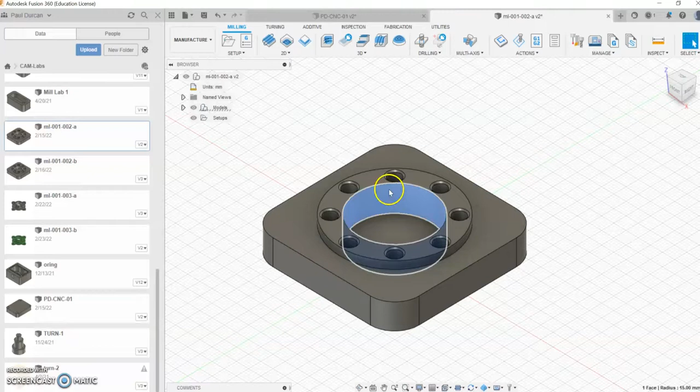Okay, we're looking at lab number 2 now. Similar to the first lab with just a few new commands. New commands being the pocket in the inside here and the tapped holes. But we'll quickly look at that and see how we go.

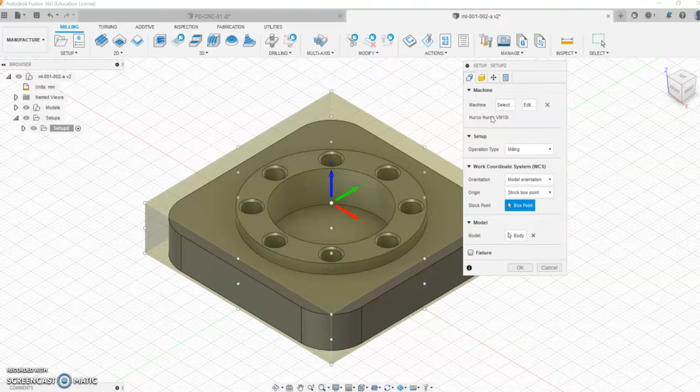So again, we upload our model onto our part using the modeling from SolidWorks. We go into our manufacturing tab from our design tab down to manufacture for our CNC. We're milling. We do setup. We select the same machine again. It should be in your library. The Autodesk 3-axis generic is fine, or the Hurco VM10i is better. Milling operation, and again our Z-axis must be the whole way up.

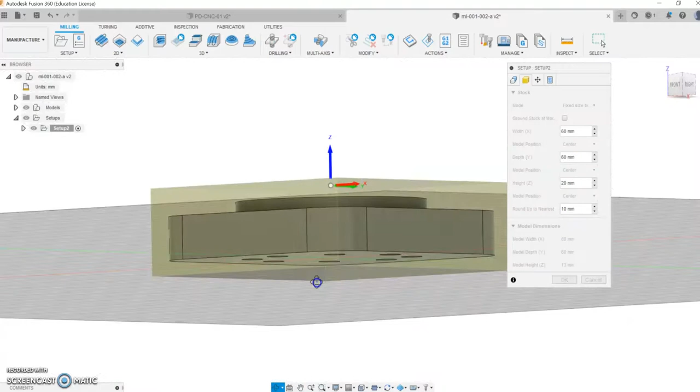Our stock setup is the same again. Rather than relative size, we can do a fixed box size. Okay, so we're looking at 60 by 60, and we're looking at a depth there of, maybe just rotate this around, have a quick look at it. Okay, so we want to correct the depth, and the 60 by 60, the part's actually 60 by 60. So in reality, we might have a block that's 70 by 70. So we'll take some material off. Okay, so it's centered there, which is fine.

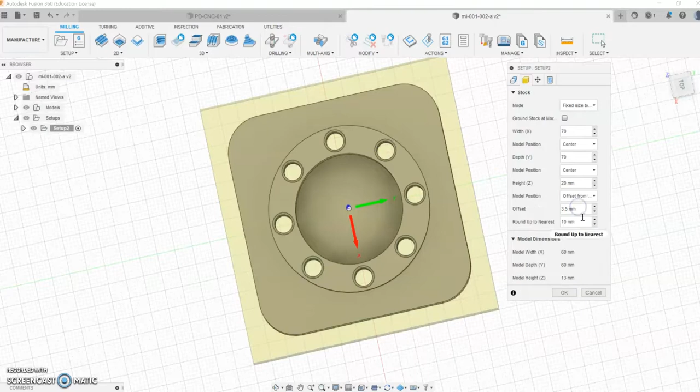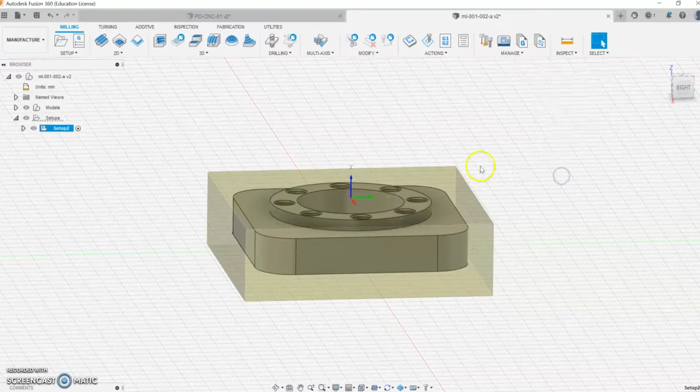And then our height's 20, but what we're going to do is offset from the top, and we normally offset it a millimeter from the top. So again, if we rotate that, we'll have a quick look there, and we're just going to skim a millimeter off the top, plenty to hold underneath. Power position, we don't need to do that. Good to go, and post-processing, we don't need to touch that. Okay, so that's our part ready to go. We have our stock set up and our machine picked.

So we're going to start off, like we did in the last one, with a face milling operation. So again, we'll just do our face milling operation. We're just going to select our tool. We're going to use a face mill. I used it previously here, so it comes up diameter 50 on the face milling operation. Our feeds and speeds are fine, we'll cover them again. Our geometry is stock geometry here, the yellow picks, we're good with that.

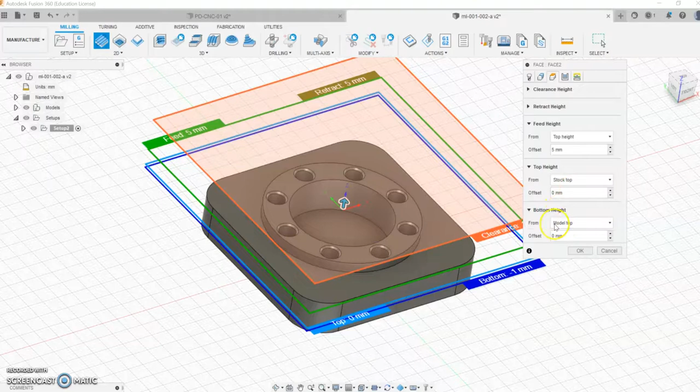Our heights then are our key again, okay? So our clearance height and retract height are usually okay. Our feed height, we're going to go from 5 millimeters from the top. Our top height is the top of the stock. And our bottom height is the CAD model, which is a millimeter again below that we set. So we're good to go with that.

The passes, we might go multiple depths in this part. And what we'll do is we want it to go over twice. And we'll say 0.8 is basically the maximum step down, and that should leave 0.2 then for the final step down. Pass extension, we can increase that if we like. So if you hover there on any of these commands, you'll see what it means. So it is the pass extension. Alright, so we could add maybe 10 millimeters to that to go on past the component. Stock offset, if you hover over it, it'll show you the distance extra it goes past the stock.

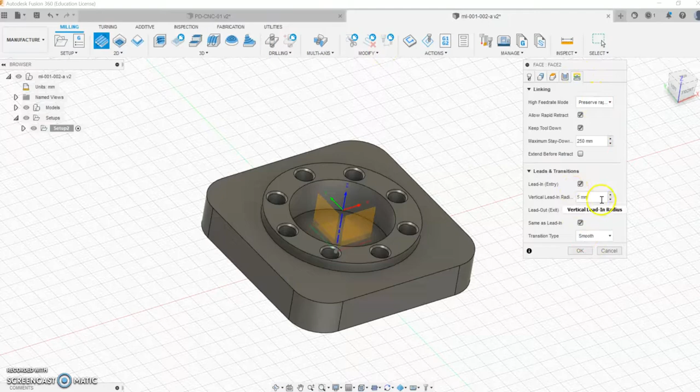Alright, and then linking, we'll leave that there for a minute. It's pretty good. Lead-in radius is fine. Yeah, and hit OK. So with every one you do, you should always check and see what's happening. So right click, simulate, and hit play, and make sure it's machining the way you want it. Now we want overlap in here on the stock. You can see on the left hand side it's actually tight enough on the overlap, so just play that again and see what that's like.

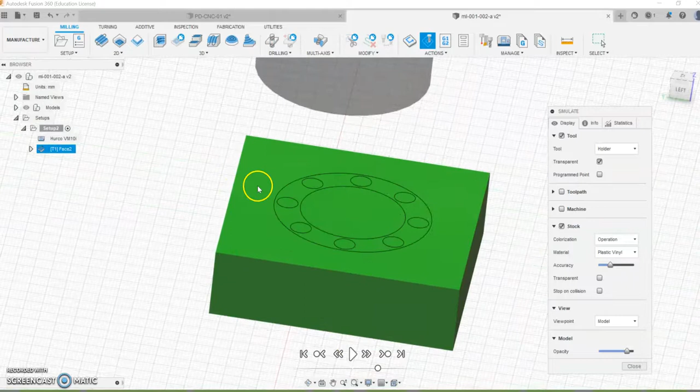Okay, so we're just barely taking a bit over that. So we want to increase that a wee bit, so that we're taking a wee bit more off that. Okay, so this one here is coming in good. This one here is very near the edge. So we could right click that and edit that. And what we can do here is on our passes.

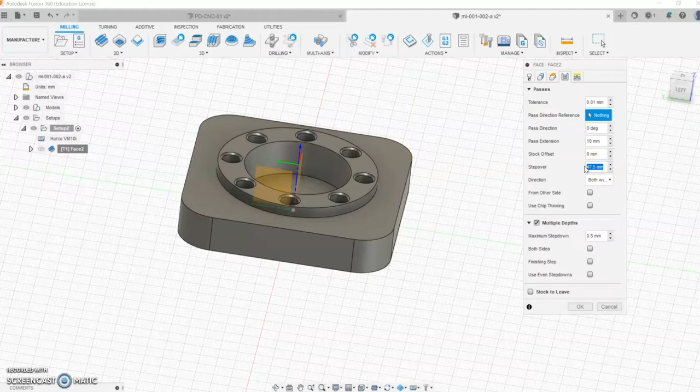Okay, so our step over here is the distance we move over each time. So I think if we increase that down to 30, we might see it going 3 times, and hit OK. Alright, and you can see here it's actually going over 3 times. Now, what I don't like, it's still going to leave a lot there. So I can right click on that again, I can edit, and I can go back to that and increase that to 45. Okay, and what I wanted to do is another stock offset. I'm going to add 10 millimeters there.

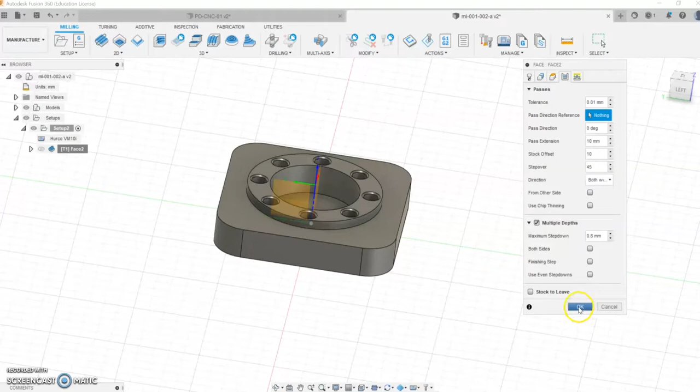Okay, to the stock offset. Hit OK on that, and what I'm trying to achieve there was multiple passes. A pass closer to the edge here, a possible 3 passes. So quick generate there to see what it's... sorry, generate and then simulate.

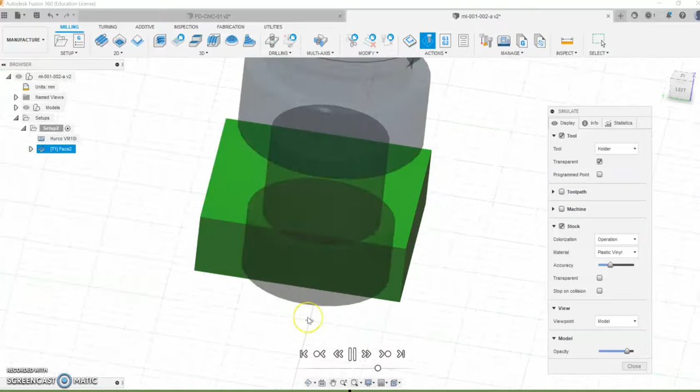Right click and simulate, and we'll just watch that there. So it's fine, and then that's better there. Okay, so it takes the 3 passes to go through that stock part. So I can close that. So that's my simulation, my face operation done.

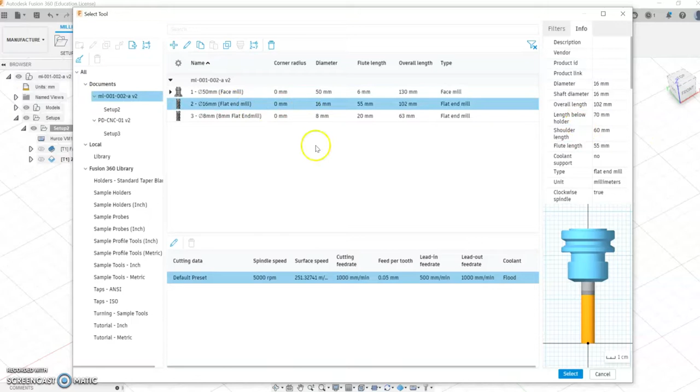So the next one is I'm going to do a 2D contour, which is the circle component. So a 2D command, so it's just going to create this. I'll actually go around and create this one first. Okay, so 2D contour. The tool I'm going to select is diameter 16, like the previous lab. It's in memory on my PC here already, but we get it. It's a flat end mill diameter 16. I'm going to hit select, and I'm going to hit geometry.

Okay, and I'm going to pick this contour here, but that contour is below stock at the moment. Okay, so it's that distance there below stock. So what I do is I go to my heights, and clearance height and retract height is okay. Feed height is 5 millimeters from the top of where I tell it. My top height is going to be my stock height, and my bottom height here is going to be basically top of the stock. And I'm going to say, just so I'm drawing here, I'm going to go minus 15 here to see what that looks like.

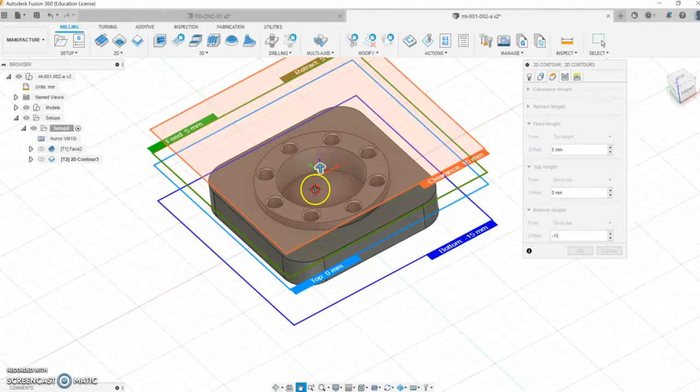And I'll have to just rotate the part here and see, am I going to be beyond the CAD model, which I have done there, so I'm happy enough with that. So I'll just see that okay in a second. What I'll do now is my passes, this is very important. I'm going to go multiple depths. I'm going to go 3 millimeters at a time. Okay. I could do repeat finishing pass if I like. Finish and overlap, I'm going to go 5 millimeters on that.

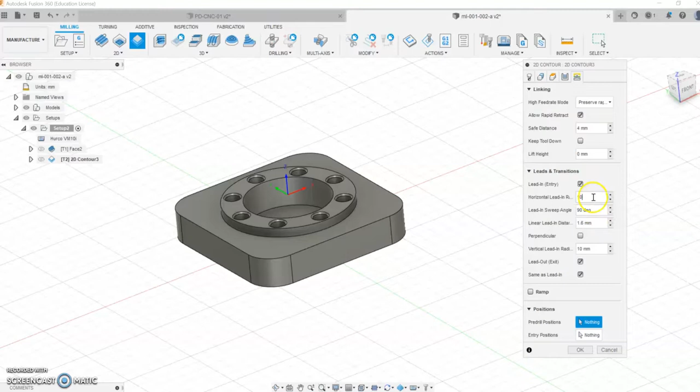Okay. And I'm going to go to my linking here. And horizontal lead in, I like a 10 millimeter, a good lead in. That's the radius. Sorry, so radius can be small, can be 3, but the linear distance should be something like 10. Okay. And I think that's okay. I'm going to try that. Hit OK. And you can see my lead in here, which I like, and I'm machining down. It looks pretty good, and just simulate that quickly to see what it looks like.

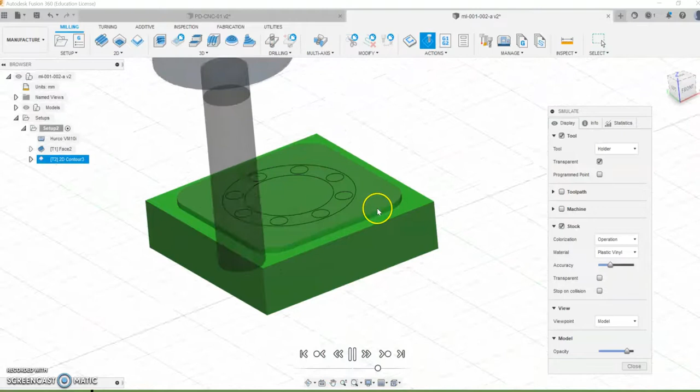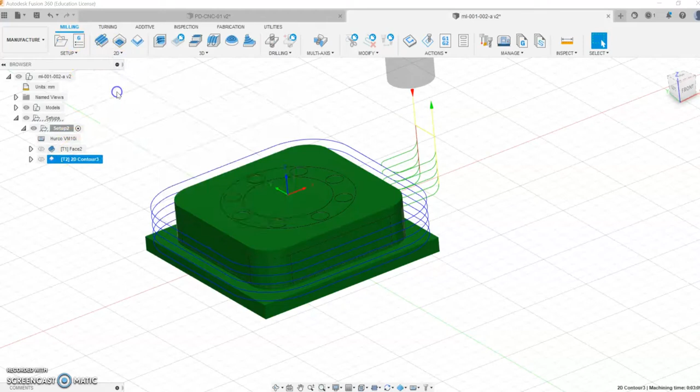So I will be machining after the face, so it's just basically machining the full, I'll speed that up, the full outside contour, which is good to go. Now I've taken away more material here, so it means when I come in to do the circle, I don't have as much to take away in that next step. So what I can do here is I can go straight into 2D again and 2D contour, and the exact same tool comes up, which is good.

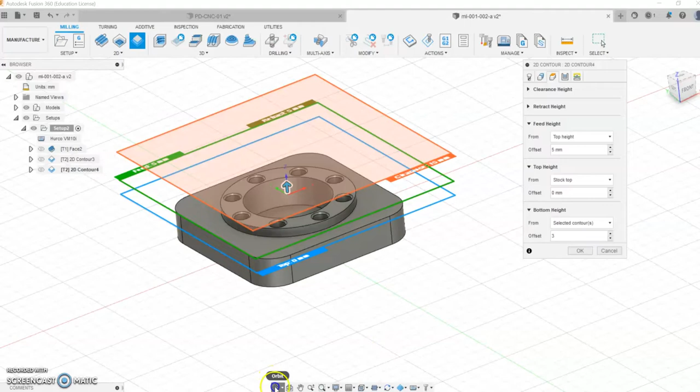My geometry this time is going to be this circle. Okay, my heights are basically, forget about the clearance and retract. Feed height 5 mil from top. Top height, I'll go with stock top. I could do -1 there, but I'll leave it at 0. And the bottom height, I could say selected contours, which is this edge here, and go down that depth. Now I just don't have to draw in here. I think it's 3 millimeters. Okay, I can just do a quick look there and see.

I think that's okay. My passes then, multiple depths is very important. I'm going to go 2 millimeters here. Okay, repeat finishing pass, and maybe just a wee overlap at 3 millimeters is good. My linking then, my lead in linear distance. Okay, I like to leave them 10 or 15 millimeters, and the radius is fine. And again, I'm going to just check that and see, have I enough done there. Okay, so we have an error there.

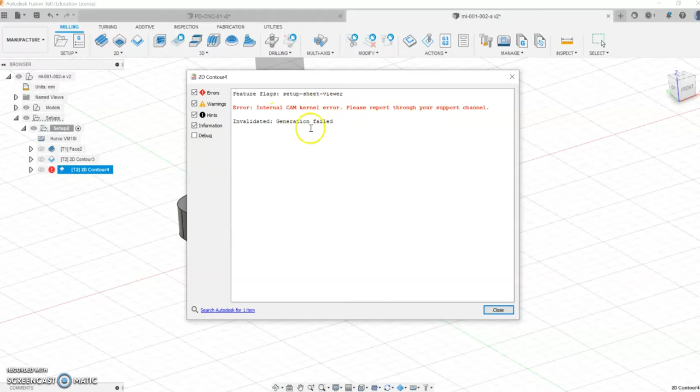Oh, so generation failed there in the software, whatever's wrong with that. So I'll just edit that and see, does it? Right click. So I'm going to delete that here and roughly do it really quick again. So I'm going to do 2D contour. It seems to be something wrong in the software there.

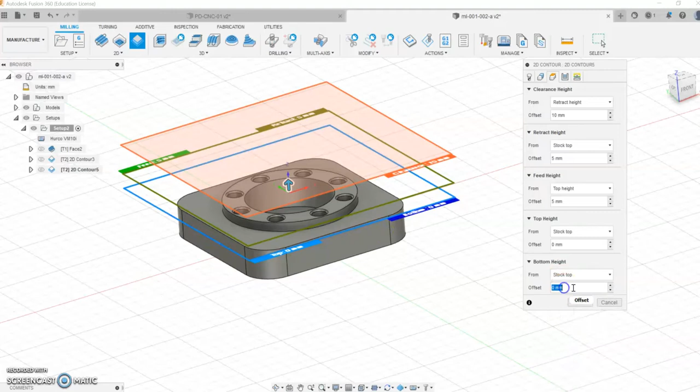And I've got the same tool, I know that from before. I have the same geometry. The heights, I'm just going to go from the stock top, which is down here, stock top. I'm just going to go -5 for the moment. And I'm going to go multiple depths. Max is 2 millimeters.

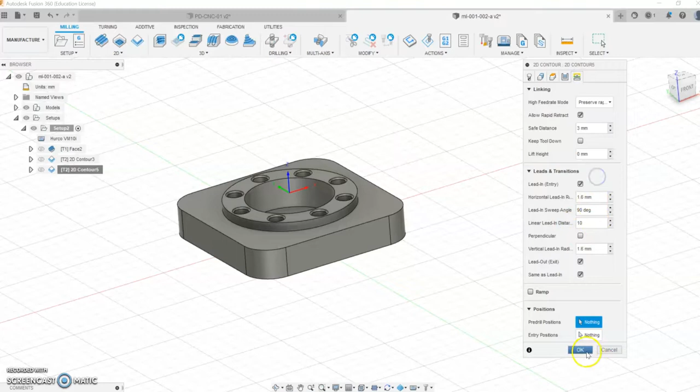I'm just going to try that there real quick and see does that work. Okay, so I'm good to work there. I've done a wee bit too deep, but I'll go back and edit this now. Not sure what was wrong with that last command. So I'm going 2 millimeters. I'm happy with that. My linking then, my distance, I like 10 millimeters there for the lead in. And I'm pretty good with that, I think.

Okay, so if I right click and simulate, and hit play, I'm happy enough that that's taken all that material away. So I'm just lucky enough that it's actually taking material. It's going down too deep, so I need to go back and change my

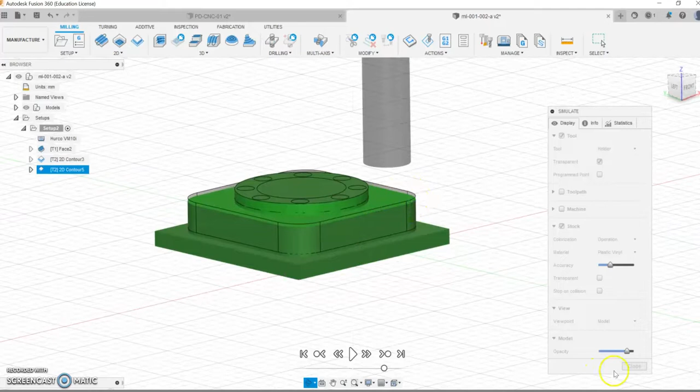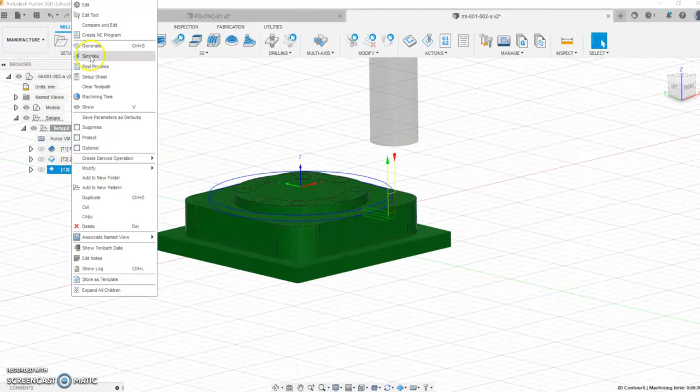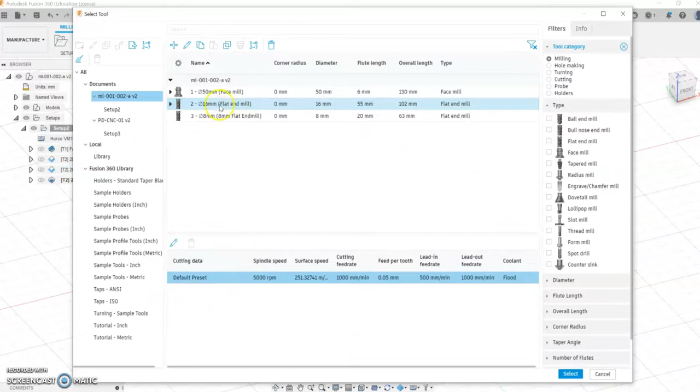So I'm flying along here, and I'll quickly do the 2D pocket on the inside. So 2D pocket, and we can use a smaller tool this time, maybe something like a diameter 10 or a diameter 8. So I have an 8 here loaded in the library. Again, go into Fusion 360 library, go your flat end mill and pick your diameter 8 there. I just have it here on memory already, so I'm just going to select it.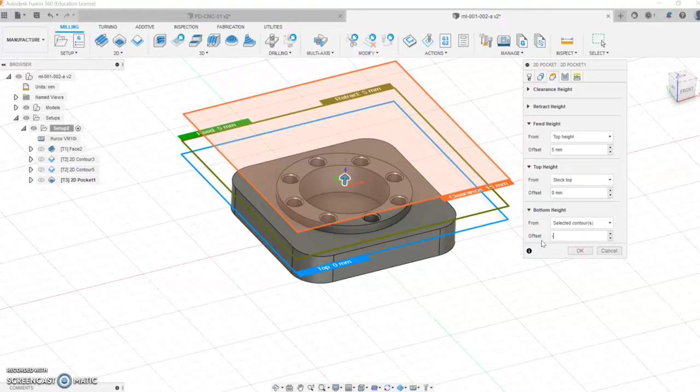I do my geometry, which is my circle here. Okay, and do my height, so very important. So I can close off these first two. I can go to stock top, it's fine, and I go select a contour. I think this is -8 millimeters, if I remember correctly. Passes is very important. No stock to leave, multiple depths. Okay, and I'm going to go a 2 millimeter depth, and we'll see what that looks like.

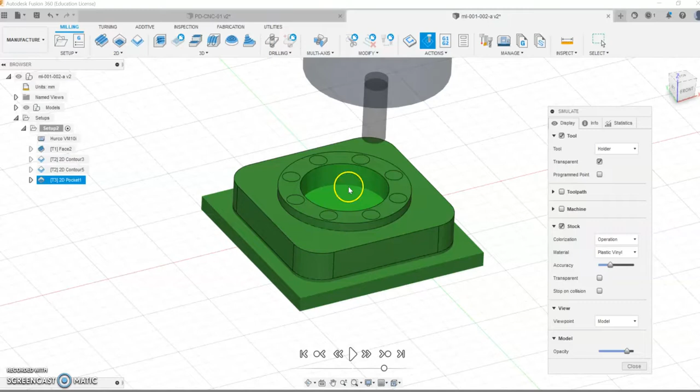This is plunging into the material, and I right click and I simulate. And hit play. And we can see here we're good to go. It's machined away the material, and that's using the 2D pocket. Okay, so very similar to the 2D contour, only in a pocket.

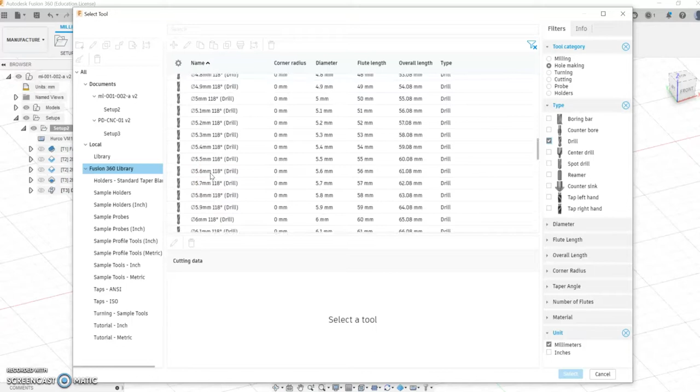The last one is I'm going to drill and tap these holes. So I go drilling, drill, and I'm going to select, I think it's an M, I can go drill library here, and I can go unit, metric, millimeters, and I can say drill. Okay, and so we'll have to go up here, and I'm going to pick a 5mm drill to tap M6. So I just select

that. Okay, and next one is I go to geometry, and I simply go around each hole. So I just quickly go around these holes. Okay, and the heights are very important. So if these are blind, you have to make sure you have them at the right depth. So it's picking up the hole bottom there, so that should be okay. And drilling and rapid out and hit OK for that. You could increase those clearance heights slightly if you liked. I'll right click simulate, and that's pretty good. I'm happy with that.

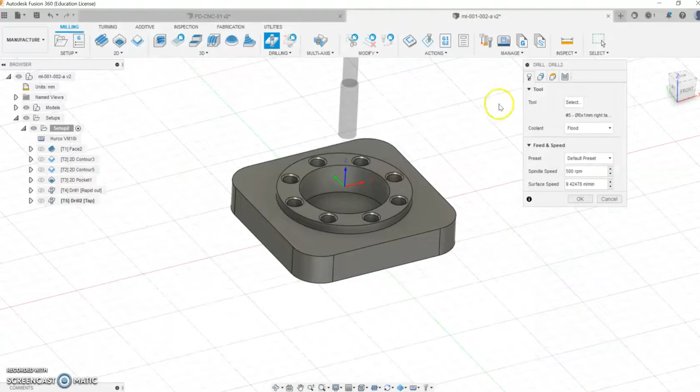I'm going to close that, and I'm going to tap these next. So what I can do is I can go drill, and select the tool, and this is how I go and actually select a right hand tap. Okay, and I can go unit, millimeters. Okay, and Fusion 360 library, and we'll go with a tap, diameter 6. Alright, right hand tap, select, and we do the geometry, which is select the same holes again really quickly.

Okay, and the key thing is when we go to cycle, it actually knows it's a tapping cycle as opposed to a drilling cycle. And we don't want to go to the bottom of the hole. Okay, we'll have to go +3 millimeters from the bottom of the hole, because we can't go to the bottom of a hole or tap if there's material in it. So we'll hit OK, and that should be the part done.

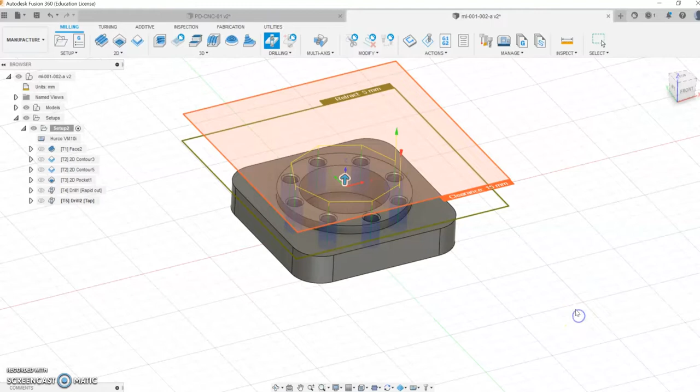Alright, so we can quickly go back and check all of these. You can add a wee countersink. I haven't done a countersink, so that's one for yourselves maybe to try, is to do the countersink with a tool and see how that works out here. Do it before the tap and after the drill.

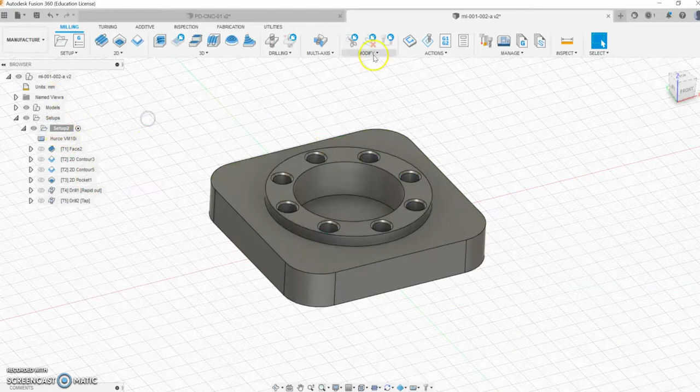So just do a quick check here on the simulate and play it, and we should see the facing operation. 2D contour, another 2D contour on top here. Pocket operation. The drilling, and then the tapping operation. And that's the part 2 done.